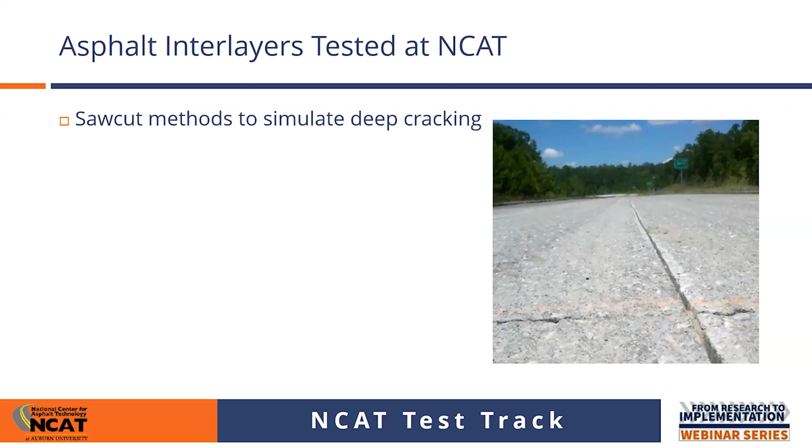So we have done specific interlayer studies, not just reflective cracking studies, for the Texas DOT in the mid 2000s, and then also twice for the Georgia DOT in 2012 and 2018. Texas used their thin overlay mix, that TOM mix, a really rich, fine mix, as an interlayer in the mid 2000s with an extremely successful experiment.

And Georgia, in 2012, they were looking at triple chip seals versus open graded interlayers. And then in 2018, they had a wide variety of test sections, which I think Tom's actually going to talk about later, so I won't steal any of his thunder.

Moving forward, though, we are excited. Some of you may have heard of our NextPAVE Challenge, which we are looking at as our large group experiment on the 2027 track, where we actually have two or three different entries into the NextPAVE Challenge technology ideas submitted from industry, geared towards preventing or mitigating reflective cracking via the use of some form of interlayer. So we're really excited. I can't wait to cut more cracks into our track. Hopefully that gets to work out.

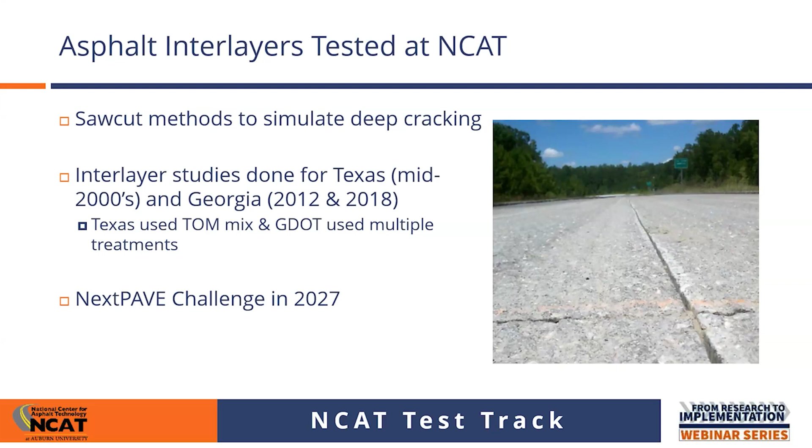Lessons learned over the years. One of the big things that we've learned, and I've also heard this in industry from a couple different sources, is if you are going to do interlayers, specifically open graded interlayers, these are really good tools for preventing reflective cracking just because they're so flexible and they really arrest those cracks and relax those strains.

But you've got to daylight them. When I say daylight, I mean you've got to drain them out the sides. If you don't, you are putting an open graded layer on top of a surface that already has cracks. And so if you get any pumping or water seepage from the bottom, it has nowhere to go, and then you end up creating a bathtub.

You have stripping potential in the aggregates that you use for the OGIs. You've sort of created a reservoir, but no way to drain it. So that's really, really important - there's a couple different options for interlayers, but if you do go with open graded interlayers, it's very important to daylight them.

And also, whenever using multi-layer treatments, specifically double or triple chip seals, you've got to be careful not to overdose emulsion content, because you're stacking these treatments on top of one another. So a lot of times the suppliers may have different recommendations for how to handle that, because you don't want something that's too flexible and doesn't have enough structure sitting up in it.

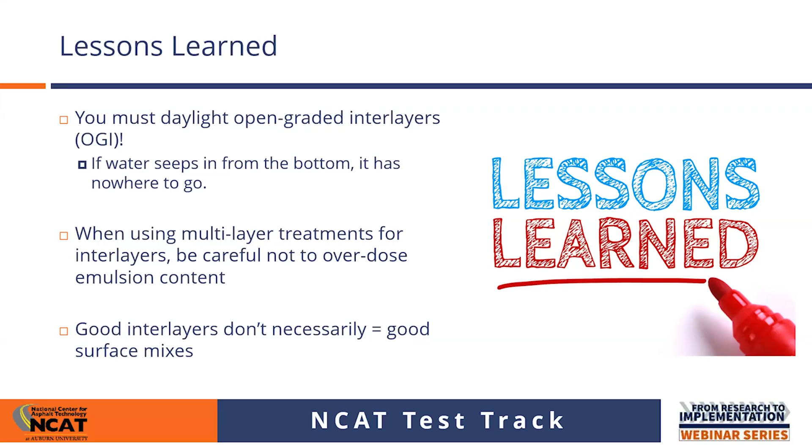Good interlayer mixes don't necessarily make good surface mixes, and this is really important. Texas used that CAM mix, and now that CAM mix is a good surface mix, but sometimes good interlayer mixes are extremely flexible and they don't always make good surface mixes. So these are targeted solutions to prevent reflective cracking, and I think it's a good way to take care of, or to maybe do rehabilitation on a particular route cheaper in some cases.

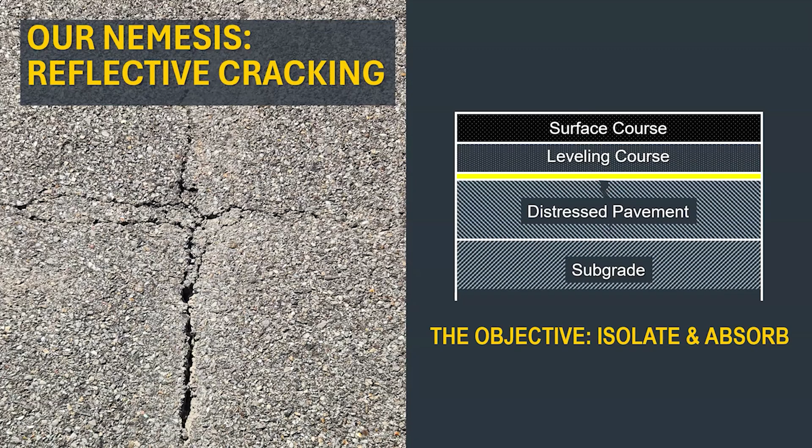So for those who have been out at the test track, it's 1.7 miles of joy in Opelika, Alabama. We're going to be looking at the northwestern portion. That's where the Georgia DOT sections are. They're affectionately known as N12 and N13. And as I go from one study to the next, you're going to see subsections appear.

So back in the first round, back in phase 5 of the track, we went in and saw cut in cracks to reflect. This was a full depth asphalt section, cut at 1/8-inch wide saw cuts, full depth. The intervals going longitudinally were every 3 feet and transversely every 15 feet. So if you assume about a 1 foot influence zone on that crack, about a third of the surface above is going to be influenced by those cracks and those joints moving as they're under traffic.

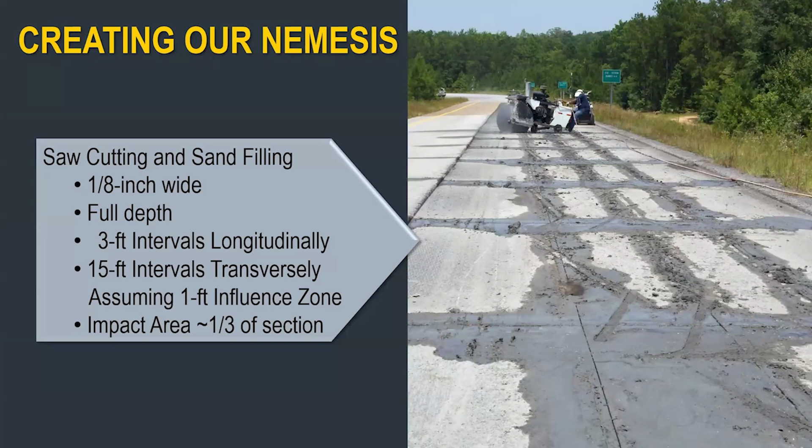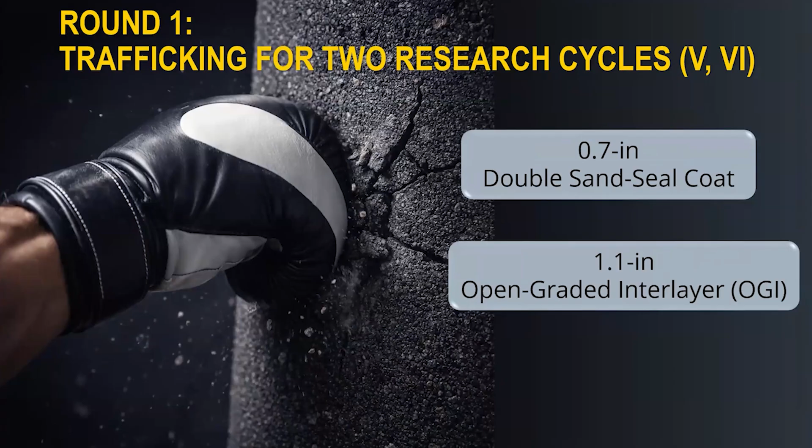So for round one, in phase 5 and 6, we tried a double sand seal coat. It was a little over a 1/2 inch thick, and then an open graded interlayer, a little over an inch thick, was applied. After trafficking of 2 full cycles, we did see low cracking with the double sand seal coat, but more than a 1/2 inch of rutting, so 0.8 inches of rutting. Not much cracking came up through, but there was a rutting challenge with that mix.

For the open graded interlayer, even though it had 50% cracking, so more than right around half the joints reflected up through, all of them were low severity, so they were under a 1/4 inch thick, and the rutting was around a 1/4 inch as well.

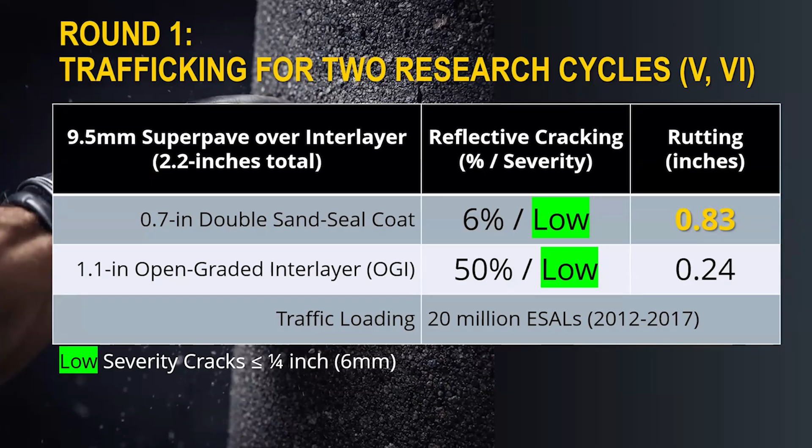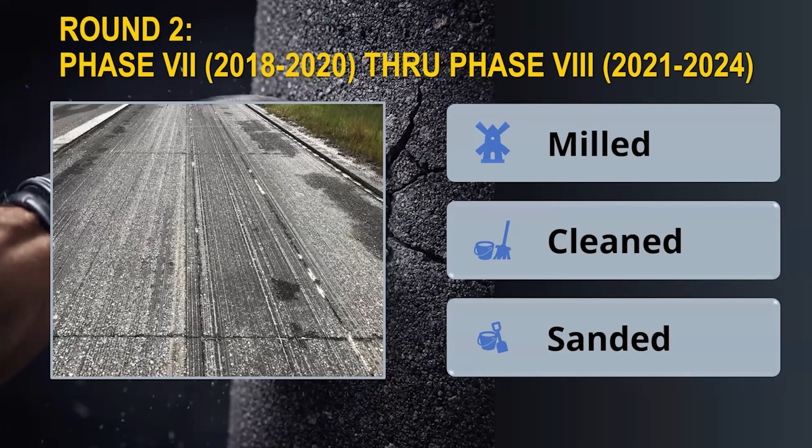So after the 2 cycles of this, we went in and milled off those sections, cleaned out our man-made reflective cracks and resanded them back down. For phase 7 and 8, starting in 2018 and running through 2024, we subdivided each section into 3. So a total of 6 treatments were applied.

So in N12, which the trucks reach first, we started out with a geosynthetic called GlasGrid. The commercial version of this was CG100. And then we went to a Petromat. I'll show you some close-up pictures of this in a second.

A fabric was applied. Our control was a virgin chip seal. It's a number 10 stone chip seal. And Georgia has used this throughout the state with some good success.

For the other things that we looked at in section N13, we looked at a more sustainable chip seal using RAP. I'll tell you a lesson learned with that as we get to that section, followed by an asphalt rubber gap graded mix, and then an open graded interlayer again.

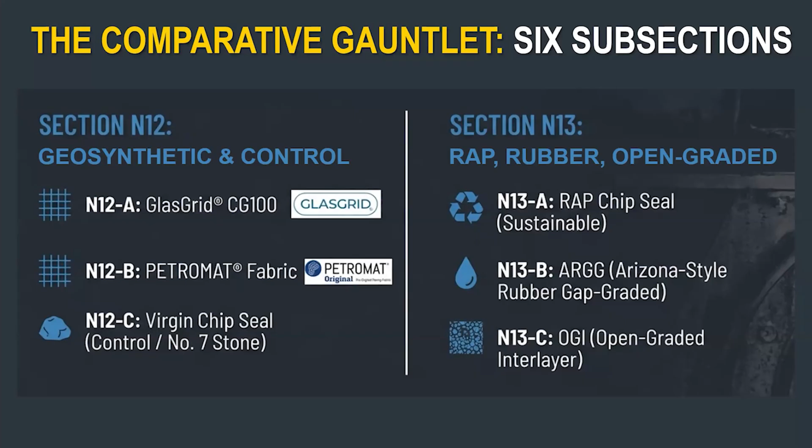So let's go ahead and walk down these interlayers as we were placing them down. Here's a photo of the GlasGrid product going down in the background, and in the foreground you can see the Petromat.

The tack that was applied was a PG 64-22. Full disclosure, if you go to Petromat and place this down, their spec says we should use the PG 70, but as you'll see here towards the end, the 64-22 worked just fine. The application rates were 0.3 and 0.27 gallons per square yard on the sections.

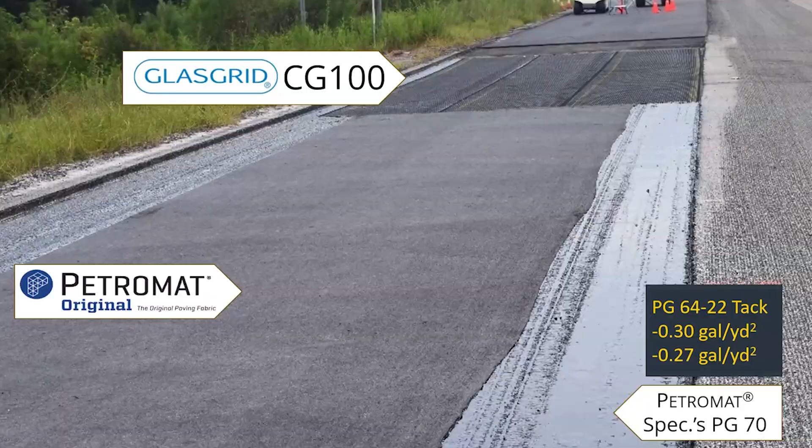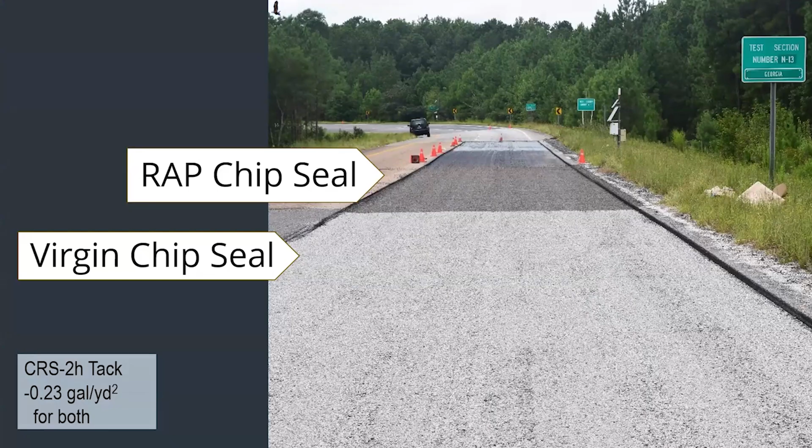Here we see our control, our virgin chip, and then the RAP chip seal in the background there. Both of them had the same tack, a CRS-2h at 0.23 gallons per square yard. Now that rate may be a little high for the RAP chip seal. We think it was because in the end we saw higher rutting in the RAP chip seal, and we didn't expect that because the RAP has already got some coating going on with it. If we were to do this again, we probably would reduce that tack rate.

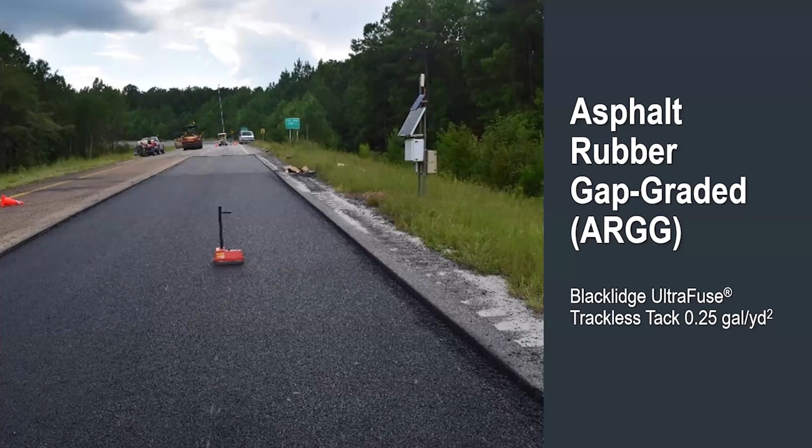Here's the asphalt rubber gap graded. For this one, we used a trackless tack by Blacklidge, called UltraFuse, at 0.25 gallons per square yard. You can see the section going down here. And then scooting up just a little bit further and looking down on it, this is the open graded interlayer, again using the trackless tack from Blacklidge, the UltraFuse being placed at 0.25 gallons per square yard.

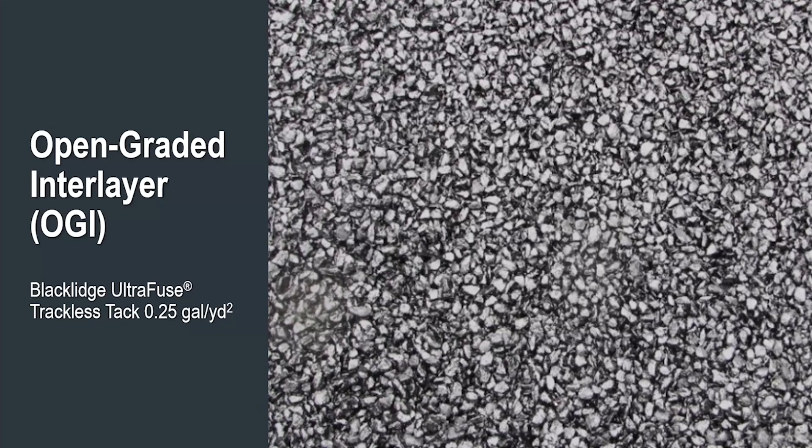Now, before I show you the next slide, everyone wants to know about ride, rutting, and cracking. Trying to get ride on short sections is a challenge, and Nathan and his team do an amazing job with that. But when you're talking about a third of a standard section, getting ride is even more challenging. And that's unfortunately what we found with our first section, which had the GlasGrid in it.

Coming off of N11 onto N12, we had a rough N11, and it started us out pretty rough on the GlasGrid section. Over 150 inches per mile was recorded. Then you can see that actually smoothed down a little bit with trafficking, where the rest of the sections started out between the 75 to 100 range and pretty much stayed in there.

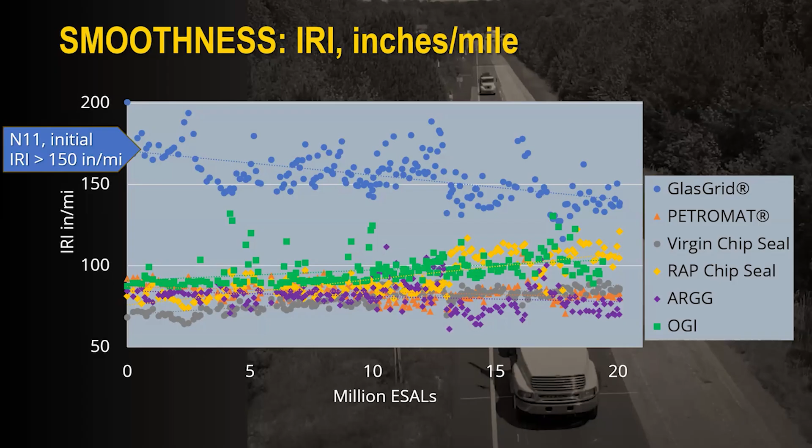If we look at the change in IRI with regard to the loading, which was 20 million ESALs, we see here that the GlasGrid got a little smoother, and by and large, they all pretty much stayed in the same range, except the RAP chip seal picked up 30 inches per mile. Again, that might be attributed to the higher tack relative to what it needed.

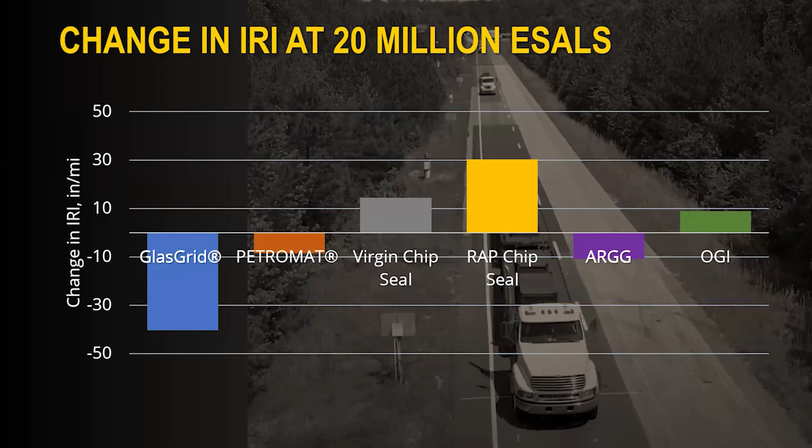Moving on to rutting, the only one that stood out here, as you can see, really no rutting at all for the first several million applications. Then we start seeing a little rutting kick up with the RAP chip seal, and that one actually gets close to half an inch, which we don't like to see. The rest of them remain relatively low rutting.

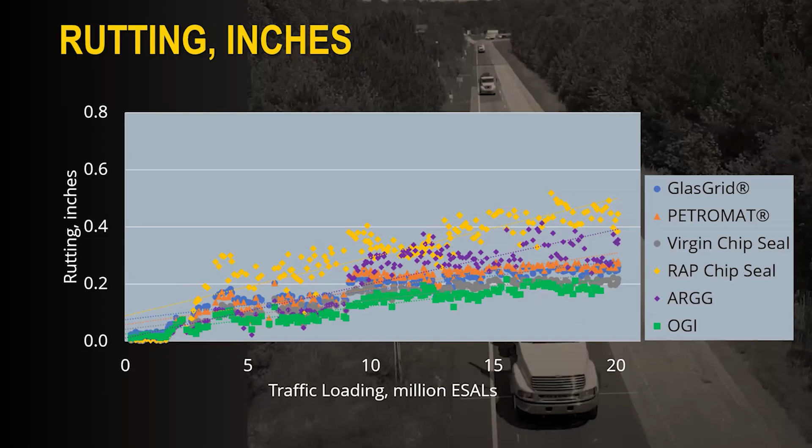So let's go ahead and look at that side by side after 20 million ESALs. What we see here is that we've got 4 out of the 6 treatments all around a quarter inch or less. The RAP had the highest at 0.4, followed by the asphalt rubber gap graded. I think that's because you get a lot of flexibility with that asphalt rubber.

But this study is about cracking, because we're trying to stop that reflective cracking. So how much reflective cracking really did come through looking at these various treatments?

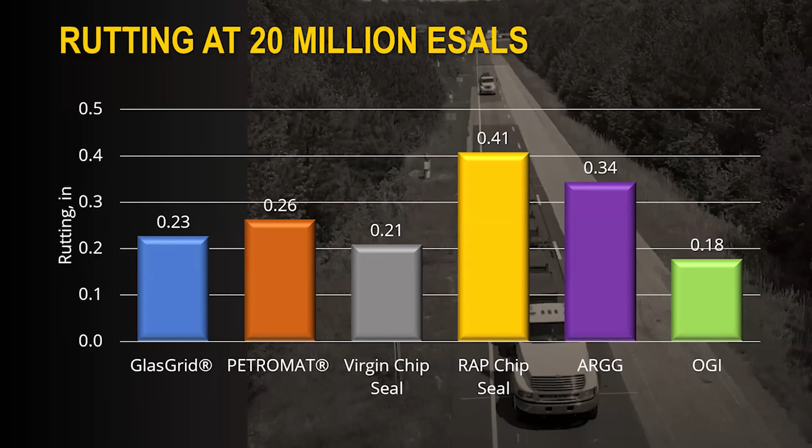Well, they look pretty good. We got an initial bump that occurred with the asphalt rubber gap graded after a full cycle and a half. So this is not starting at 0, this is at 15 million ESALs. A little over that, we got our first crack showing up in the asphalt rubber gap graded. And after 20 million, it finished out with only 3%.

And that's pretty awesome, that's percent of lane cracking coming through. The rest of them held fast to almost 19 million ESALs, and then we saw a little cracking appear in both the open graded and the RAP chip seal, where they both finished out at about 1%, so 0.8. Looking pretty good.

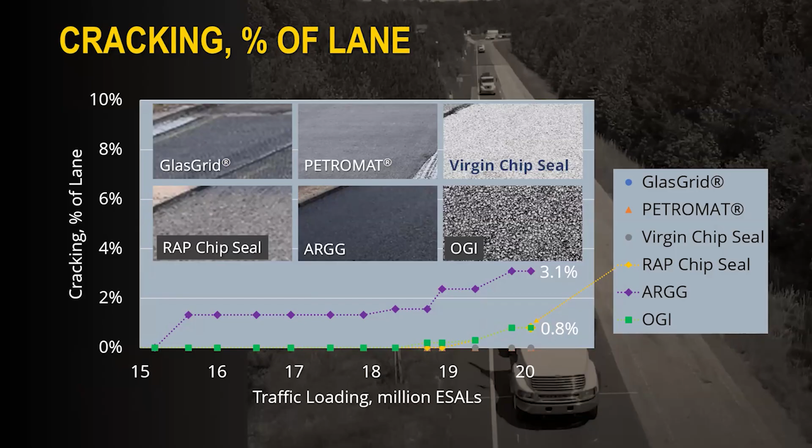So for these sections, let's sum them up, both the first round that we had in cycle 5 and cycle 6, as well as 7 and 8. Here's a summary of all of them, looking at it from a cracking percentage. First of all, the first rounds did not do as well as the second rounds. We did see cracking and rutting in them.

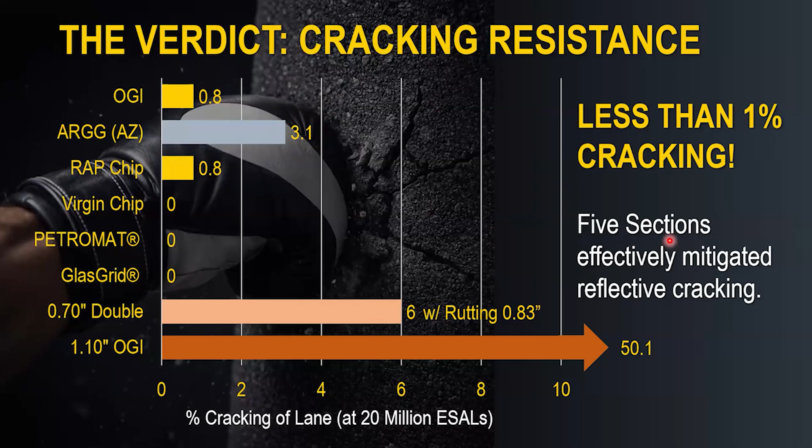But then, for the virgin chip, the Petromat, and the GlasGrid, no cracking at all. Just a little bit of cracking, and the asphalt rubber gap graded had it the most at only 3%. So 5 of the sections effectively mitigated reflective cracking for a total loading over 4 years of 20 million ESALs, which is pretty amazing.

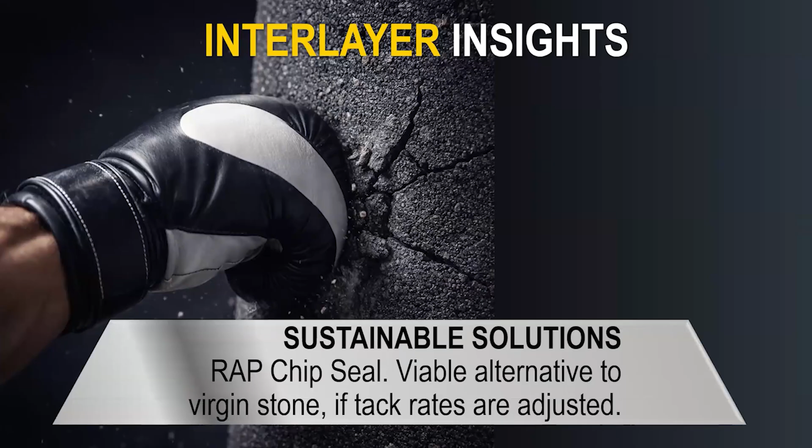So for our interlayer insights, as we go through these 2 rounds where we're trying to mitigate those man-made cracks: for sustainable solutions, the RAP chip seal seemed to work as a viable alternative, although we would adjust the tack rate down, we believe, and that would address the issue with regard to rutting.

For the reinforcement solutions, excellent. The only thing I've heard anecdotally on this: don't let your first application of trying one of these concern you if you have trouble rolling them out and laying them down. If you're not familiar with it, it's a product you have to get used to. Please work with the manufacturers, they are there to support you on that.

And then, a variety of approaches took on our nemesis. They showed that we got the maximum performance. We couldn't get the reflective cracking to come through even after 20 million. So with that, they have been validated by the Gauntlet, which is the trucks out at the Asphalt test track for NCAT.

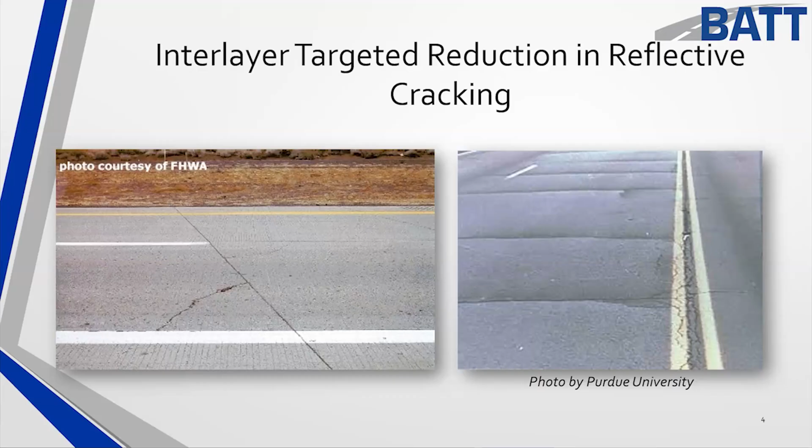And the shear movement was shown years ago to be the most difficult, in studies done by Monismith and others at Cal Berkeley.

In the 90s, interlayers were used, or even before that in France. In 1998, I was working at a company called Koch Materials Company. We brought it to the US naturally because it had a high polymer loading in it and it worked well for our business, but it also worked well for the business model to bring new products and try to innovate. Various levels of success, because we have a much broader climate area than what you may have in areas such as France, from our far north to our desert areas to the deep south.

From 2002 through 2006, I got to work with Bill Buttlar on a National Science Foundation grant where they modeled accelerated loading and testing. There's a reference number if anyone wants to look at this. They developed ABAQUS models and all these wonderful things for pavement design for the interlayer, because nothing was out there that really described the interlayer well at the time. And current pavement designs, there's nothing where you can flip a switch to introduce an interlayer into these pavement designs to do what it does.

Out of this test comes what's called the DCT, that you may hear about today, used up in Minnesota and FAA. It was actually developed out of this work as a test to measure the thinner roadway core properties we were trying to measure back then.

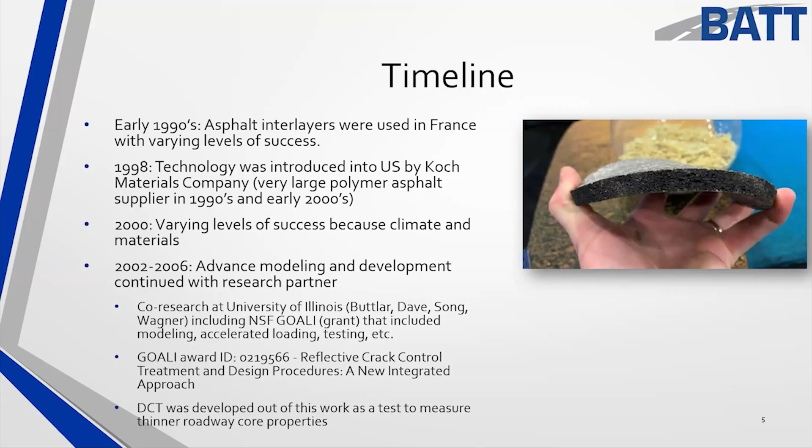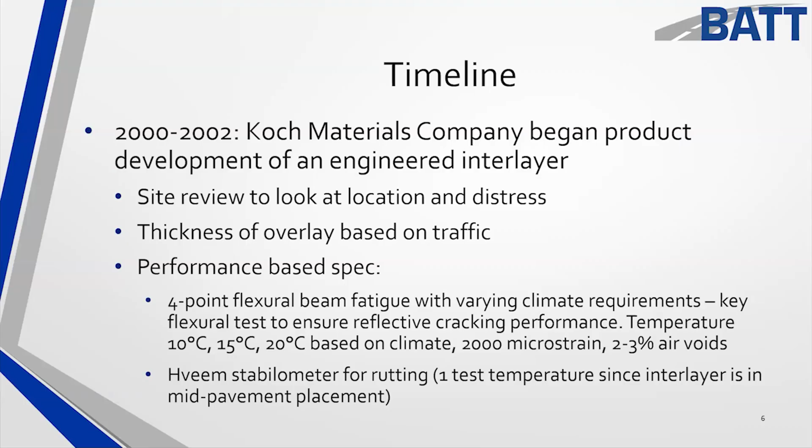And when I say a 4-point beam fatigue device, those out there in the technical world that love to run this test - we're not talking about 200 microstrain, 800 microstrain. We're talking a 2,000 microstrain requirement. So this unit, if not set up right, would about jump off your desktop with the level of movement.

Moving on into what we look at today, there's some 20 states that may have old specs in place. They already mentioned Texas, which has their CAM mix - they use an overlay test. You'll see remnants of this original interlayer, if not the original, in Wisconsin, Iowa, Kansas, Kentucky still uses it, New Jersey, and you may see it with a fatigue spec. You may see it with other tests.

And out of necessity, where I wasn't always able to get the polymers used back 20, 30 years ago, I had to come up with alternate ways and try using newer testing.

While adoption slowed due to lack of understanding, today interlayers are still intact while the surface has been replaced, which has raised eyebrows that we need to go back and look at this product. For example, one was placed in Kentucky just north of me on I-75 with about 40 million ESALs. It was put down in 2007. It has now had two overlays put over top of it with the interlayer still intact. It bridges the joint where you do not know that the concrete pavement is underneath, because by offsetting the crack, it improves ride. So again, it's used but it's not for every pavement. It's a system that we only need to use in focused areas where we have cracking or limited solutions, and I'll show you those here in just a moment.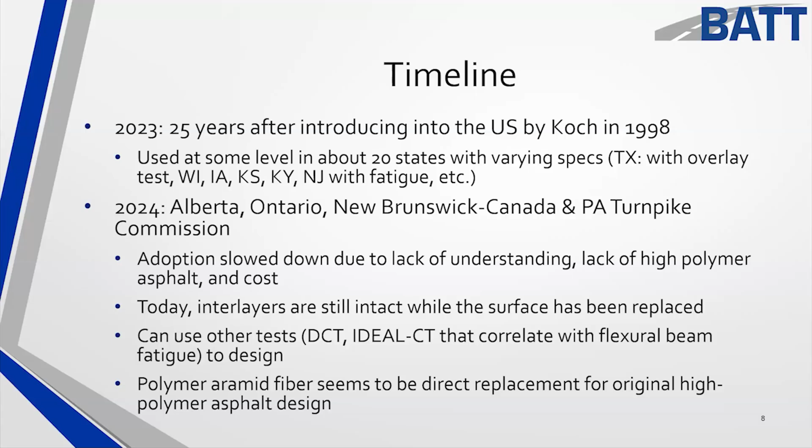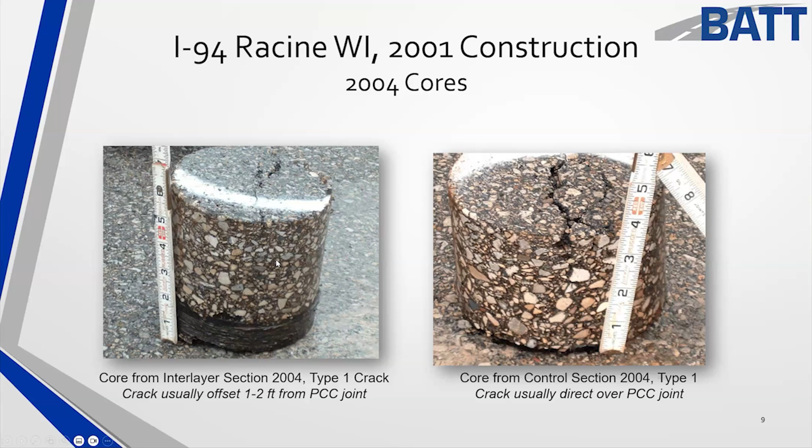The problem that we talk about is what you see on the right. You may have a crack when you take a core, and it's a very pronounced crack that may come through. As you see the crack, if you look closely, you'll see the crack going all the way down with the ruler there, and it does come off the bottom where you would have had the joint. When we began to core where there's an interlayer, here's an actual core on the left with the interlayer on the bottom, you can see the difference in color, the richness of the interlayer. Instead of having an aggregate structure that's filled with asphalt, you have an asphalt binder that we fill with aggregate, almost to a mastic level. By doing this, we have a crack dampening system that really significantly delays the cracks, also causes a waterproof barrier, but offsets the crack for up to about 3 feet. That's the real interesting part of this interlayer, because we went out to core these projects and had to chase the crack across the pavement to even find where the joint was below.

This is the power of using an asphalt dampening system or an interlayer. There's a lot of good products out there that have worked this through the years, and I use the SAMIs myself, or the high polymer chip seals. But the interlayer is the only way that I'm talking about, that I'm going over today, to be able to get a 1-inch to up to about 1.25 inch crack dampening system in place with some level of structure that you can run a paver over it and have something that can be recycled if you want to take it up. But for the most part, it's perpetual. As one person said, this is maybe a way to convert a concrete pavement to a perpetual pavement.

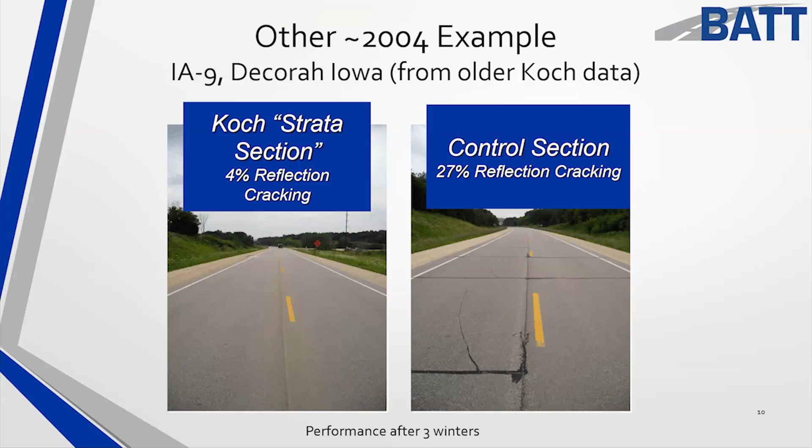At the end of my tenure, and the data that I had in 2006, I left in 2007, we saw about a 71% improvement in reflection cracking. They called it strata back in the day, but that was a high polymer performance design. Today we would call it a BMD design, and we'll go over that here in just a moment. That's using 98% reliable overlay with 100,000 plus fatigue cycle interlayer spec. That represents up to 18 projects built up to 4 years old at the time.

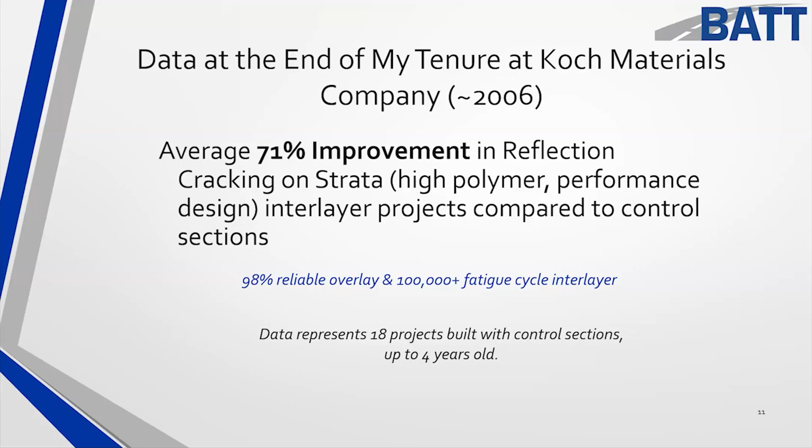So can we stop the reflective cracks? I like to say no. That was my typical answer till I saw data that really changed my mind on that. When you use the reflective crack relief interlayer, University of Illinois found in their studies that it significantly reduced the movement by up to 80%. But you have to have a surface that can still handle that remaining movement. So we can't put something that's ultra brittle on top, or the crack will come through as we would typically see. Now, we're going to slow it down, but what can we do to help remove that last 20%? I've seen SMA overlays over the interlayer that shown much promise with little to no cracks.

Those were in the early projects. I do believe, with the promise of high mod and what we're seeing today, high mod itself does an incredible job. You put it over the interlayer, and I have no reason to believe we couldn't nearly eliminate these cracks. That's not a cheap solution, but if you want to completely eliminate cracking, assuming you don't have excessive movement and slab rocking, we can do that. Otherwise, what you're doing with these systems is delaying the problem. Tom would probably correct me and say, Phil, what about 30 years from now? Yeah, Tom, you're probably right, something eventually is going to come through.

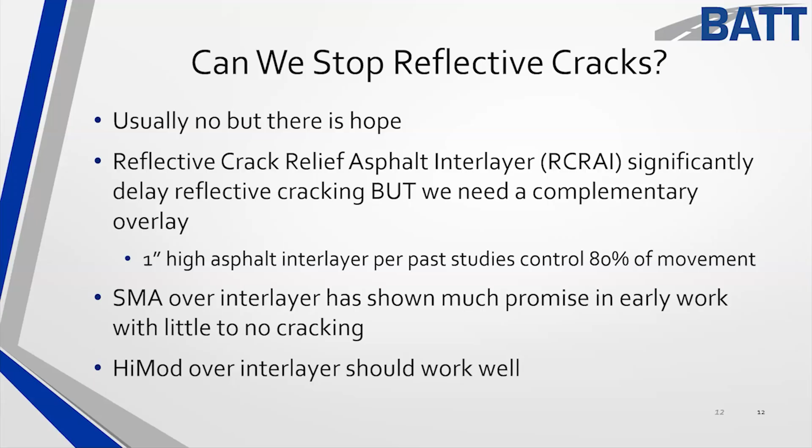So let's talk about the mix design. This is an ultra fine mixture, looking at something with 0.5 to 2% air voids, minimum VMA of 16, more typical is about 18. On the right you see what would be considered a design gradation band. We're using a high amount of fines, so contractors out there with piles of fines, this is for you. Typically we're using natural sand, manufactured sand, and screenings to make this blend of materials.

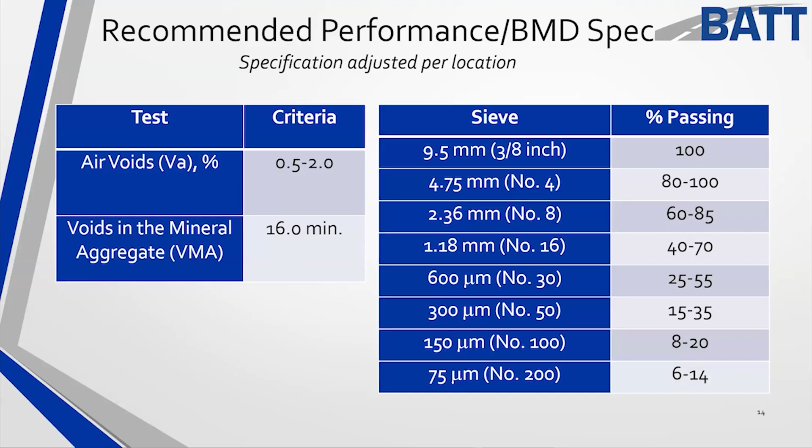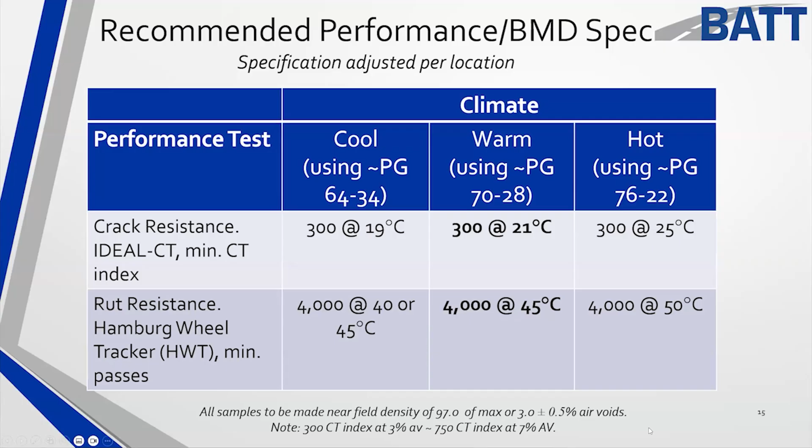Depending upon what climate you're in, I bolded the center one because that's where I am in Kentucky, so I sort of use that spec. If I move over to the right as we approach Alabama, down at the track, guys, I'd probably be looking at what you're recommending once you get into that 22 and warmer climate. It just happens that a CT at 25 aligns pretty well with what you're doing down there anyway.

Why in the world did I use fiber on this one? I don't have the polymer system I had back then. I needed tensile resistance, and it complements the system really well by giving me tensile strength. Bottom line is, whatever you can use to put in this system to get these values, you can do it.

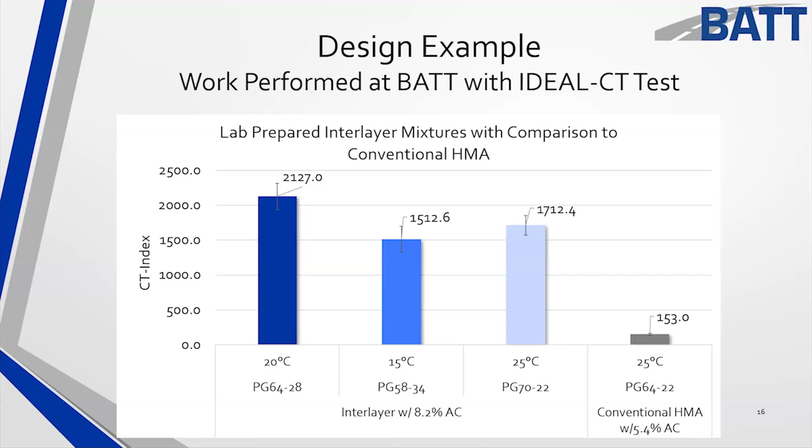This is a performance-based design. The conventional mix is that little spot over there on the right, maybe at 153, and I'm telling you, 153 CT index is a good number. But it is possible to achieve higher values than I'm showing here. Nathan, I don't know what you've achieved at NCAT, but I'll just throw it down that I've gotten over 2100 at 20C on a CT index. So there's the challenge to you, okay, see what you can do.

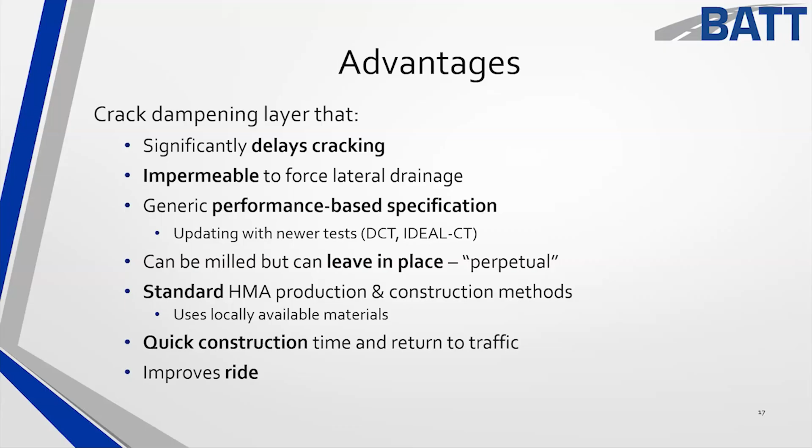The crack dampening system significantly delays cracking. It's impermeable, generic performance-based specs, and it can be milled, though I recommend leaving it in place. It's not going to crack, and it does heal with all the asphalt that's in it. Using standard HMA production and construction methods with locally available materials, this is something a contractor can run through their plant easily. Quick construction, quick return to traffic, and it improves the ride.

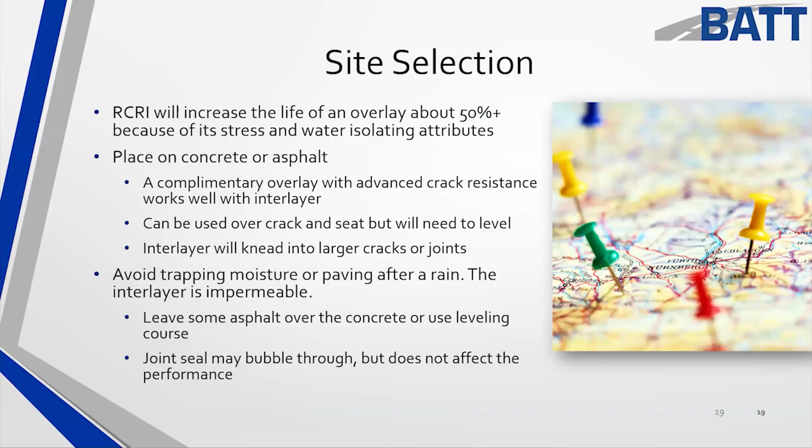A little bit about site selection. I'm not going to spend a lot of time on this, but when you make this impermeable, you can trap moisture, so you have to pay attention to that. There's a less impermeable version that can be designed to open it up a bit. You lose a little bit of crack resistance, but not much.

The overlay, depending upon the traffic level, these are what I've recommended over the years. This has been my safe zone. I have never seen an interlayer rut, and I want to keep it that way. By doing studies and using performance testing in the laboratory and dialing it in, these are the values that I came up with years ago, depending upon the traffic level.

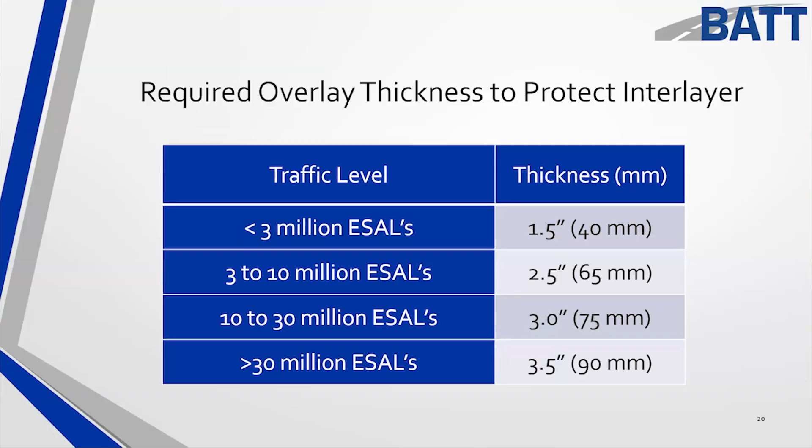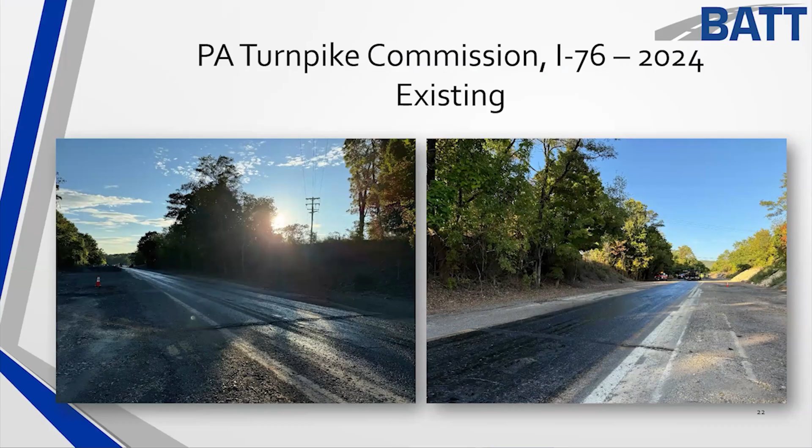2024 project. This was a section of the turnpike. I'm going to move through these pretty quickly and then we'll be done. This was a section of the turnpike that we did in 2024.

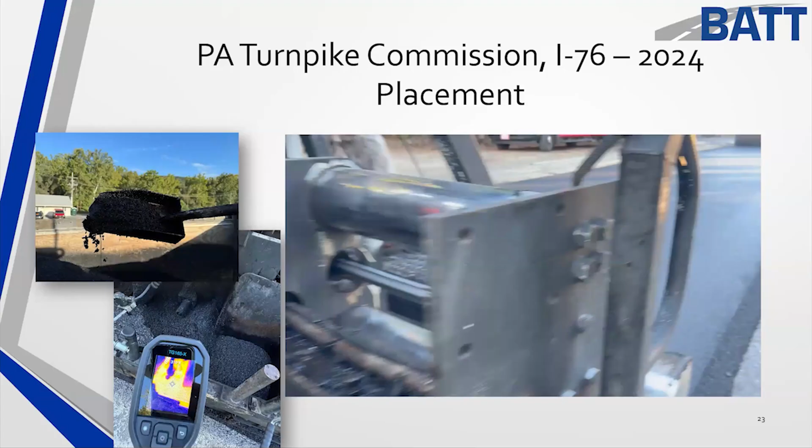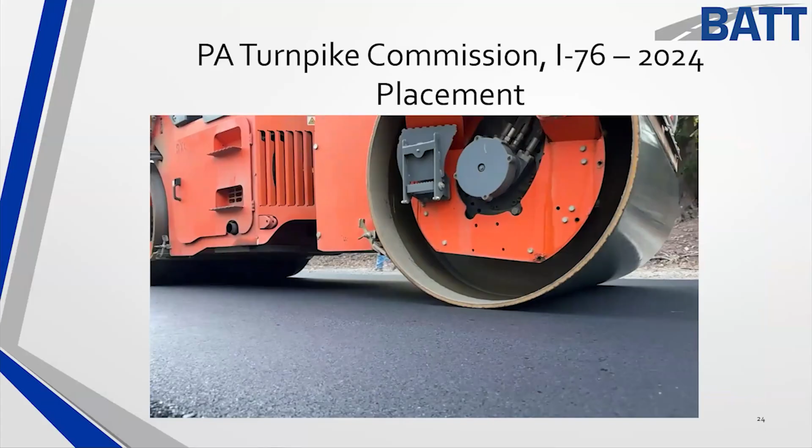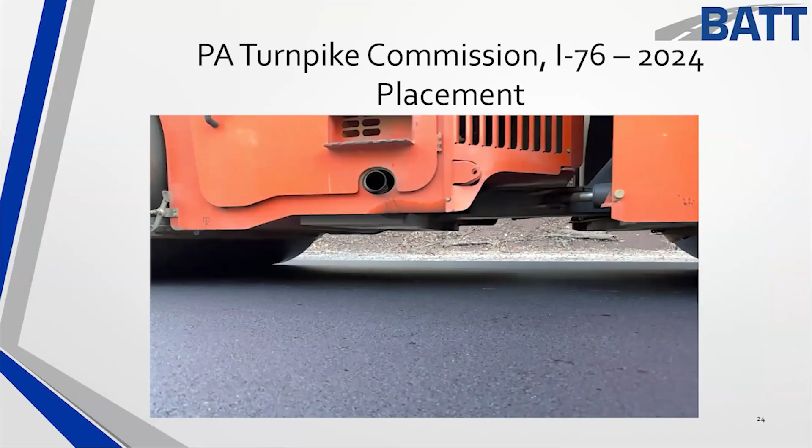This was actually the test section that we put down, and this was an abandoned area, so we did not have any traffic on this one before they moved out to the main site. You get an idea when you put a roller on it. You would think something that may have 8.5 to 9% asphalt may move everywhere, but it is incredibly impressive underneath the roller. If you do get the asphalt way high on this one or way low, you do get a very unstable mixture. But in this case, you're compacting at about 1/8 of an inch per inch, and there's not a lot of room for it to go behind the paver.

There is a little bit of flushing on this one that you see. They decided they wanted to vibrate this one, which is fine. You're going to bring the asphalt to the surface. This is not a riding surface, this is an interlayer. Some may ask, do you want to put tack over this? Absolutely. This project may have had enough free asphalt, we may not have needed the tack, but we still tacked it.

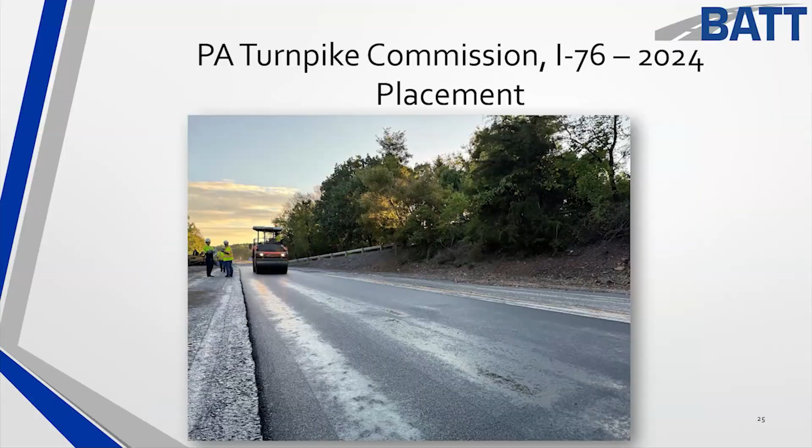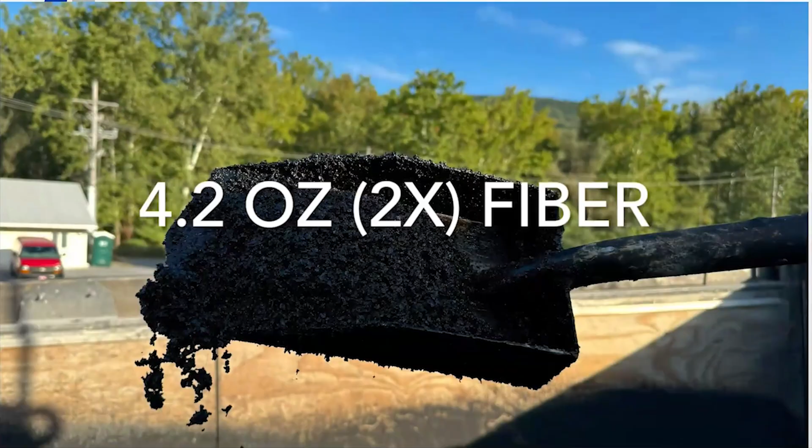This gives you a little bit of an idea. This was done up at New Enterprise. This is a quick video just summarizing everything that we just saw. Surface Tech supplied the fiber on this one that went up there. And this, again, just shows you what we had looked at before, going through the paver.

There's another one I'm going to show you here in a moment where we had some hand working of the mixture. Normal process, the rolling that you've seen, and then I've got a picture here coming up of where it was actually put down on the interstate up there, and of course that looks good, and that's the team up there with Chris Forey and the folks at the Turnpike.

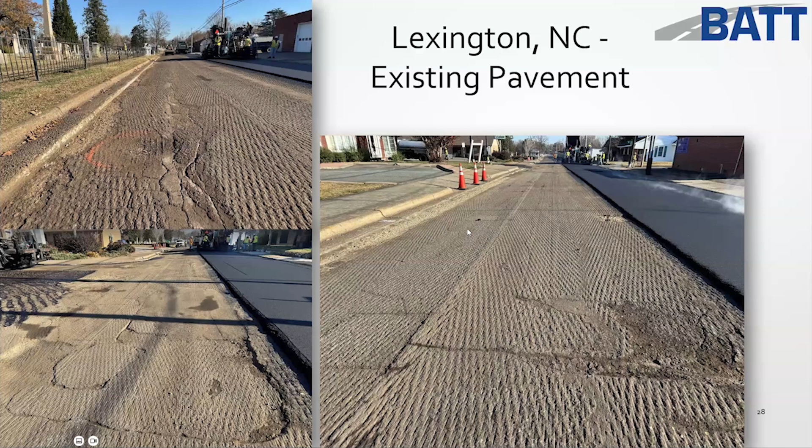Last year we went to a city street. This is a very favorable project for city streets because you're locked in with concrete, you can't do much with it. And this is a pretty ugly one. What we're looking at here, we had to do special milling along the curb line to be able to key in the interlayer. I'm just going to move straight to the video to summarize this because this, again, gives you an idea of the distresses, the tack before, the fineness of the mixture.

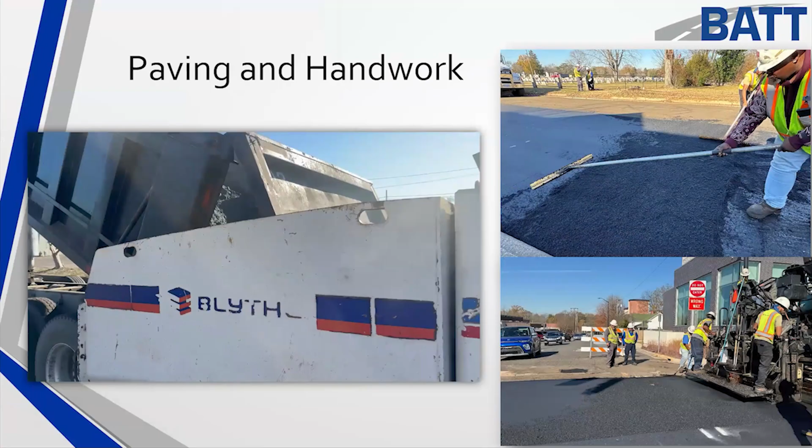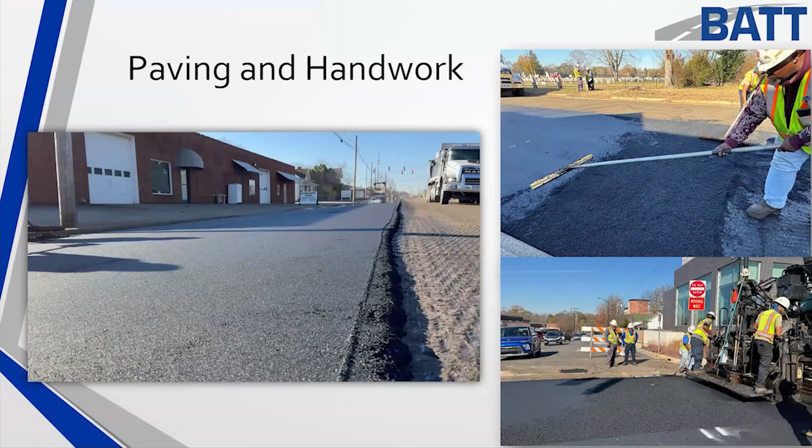Again, the paving process, the hand working is over there on the right. You can hand work this one, move it around. You can imagine with the asphalt content, when it starts to cool, it will get gummy, but nothing unusual. Let me just move straight to the video on this one.

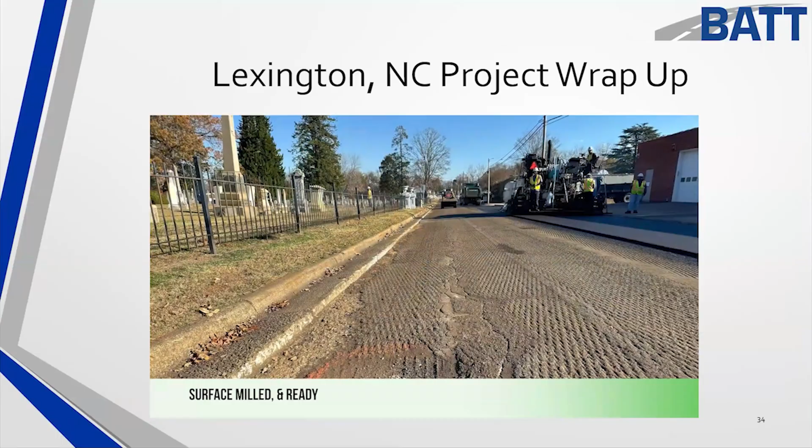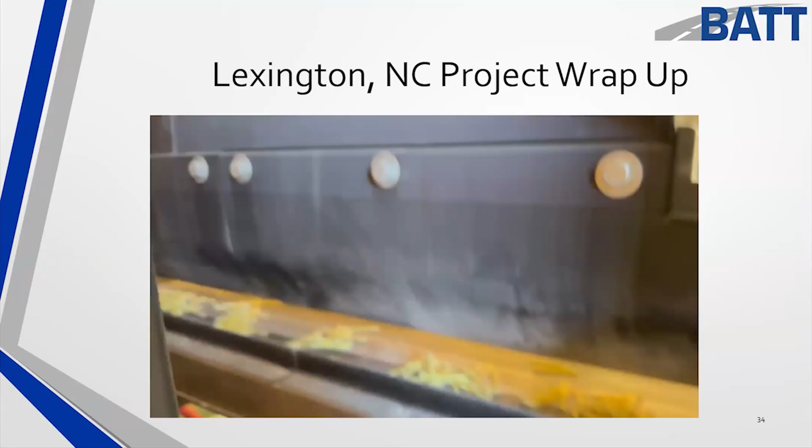Again, the pictures that we saw before. This, again, giving you the idea of what we were covering. Blythe Construction did this project over in Lexington, North Carolina, did a great job with this one. This one had a little higher asphalt content because we're working with the granite materials. Again, showing you the fineness of the mixture. No problem going through the paver.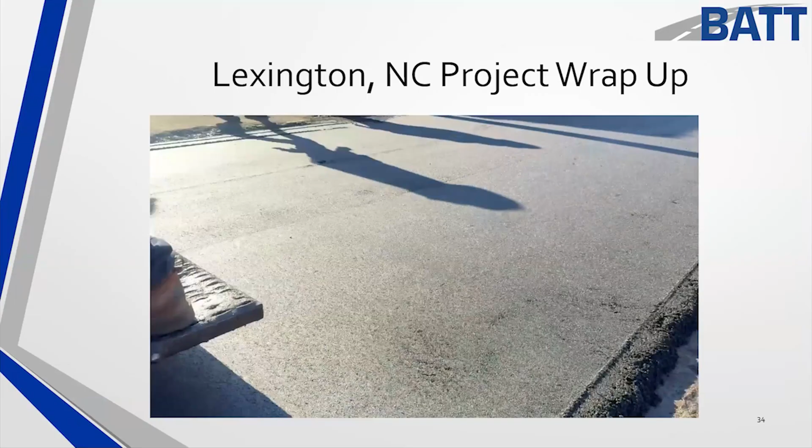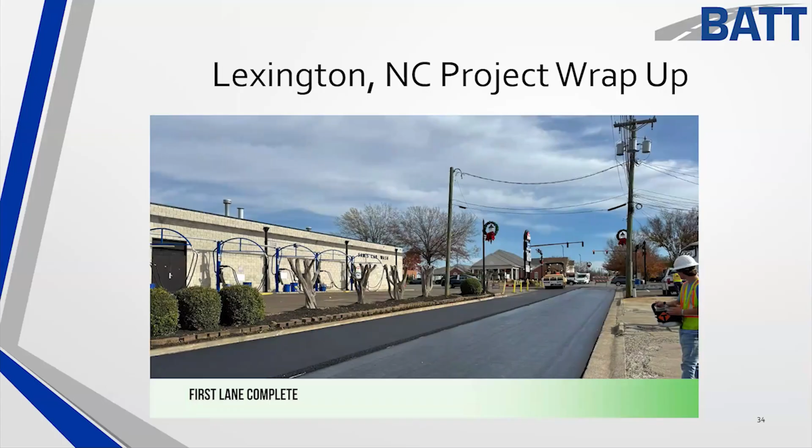Very little sticking because, again, we're not using the high polymer on this one. We were using a 7622 on this one with a double dose of fiber. Again, this one had about 1.5% air voids, I believe. This shows you what it looks like with one pass the interlayer down before we put the other. Again, the hand working, no problem.

The final interlayer, and then there's the guys down there that we worked with on the project, and the guys over at Withers Ravenel, the consultant. Now they're putting the surface on, and hopefully it's ready to perform.

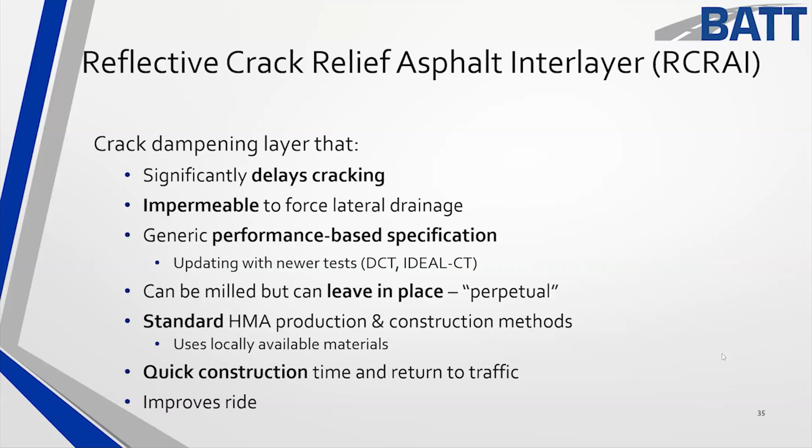I've already covered what we talked about here, but I'll hit it again: we're going to significantly delay the reflective cracking. It's an impermeable, performance-based spec. You can mill it or leave it in place. Standard production, quick construction, improves ride.

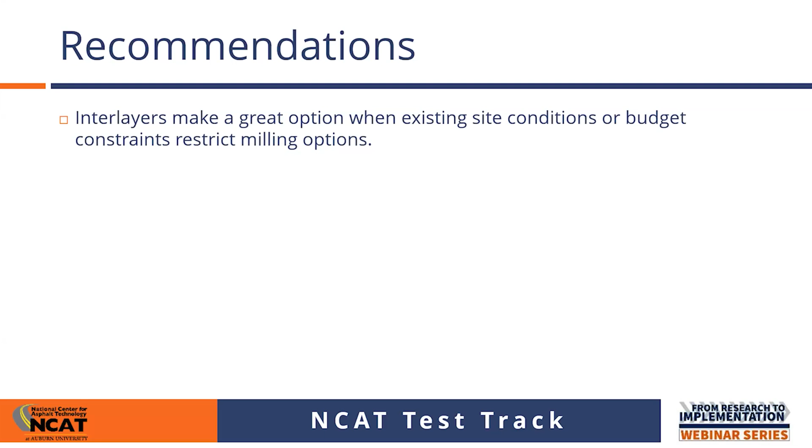To summarize what Phil and Tom talked about: these interlayers, whether asphalt-based systems or special products designed for reflective crack prevention, make a great option whenever existing site conditions or budget constraints restrict your options. Maybe you can't mill as deep because the city maintenance budget can't handle it. These treatments and technologies are great options for you.

A couple things Tom talked about: being careful, you need to adjust the tack rates to prevent over-softening or rutting, especially if you're using surface treatments like RAP or virgin chip seals. If you use too much tack or too much emulsion, you can actually end up over-softening that layer, and then you get rutting, not from whatever you're overlaying on top, but rutting from that interlayer itself. So you have to be careful about that.

I loved that, Phil. I actually participated in the Q&A and asked you a question. I like your rutting spec, and I'm curious, but we'll get there in a minute.

Quality control is super important. For some of the asphalt-based products, it's important because these aren't traditional bread-and-butter asphalt mixes. Phil showed a picture of just a black layer that he talked about: instead of adding binder to rocks, you're adding rocks to binder. So even in situations like that, QC is very important, but especially for the engineered products.

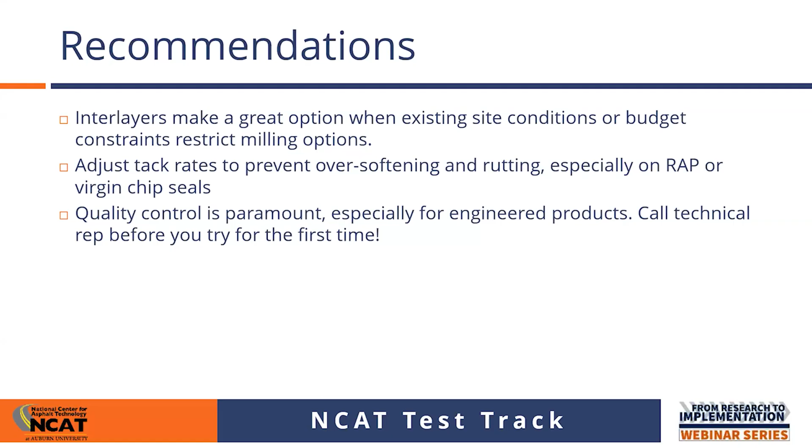The specially designed interlayers, if you are doing something like this, it's a big recommendation to call a technical rep before you try it for the first time. What you don't want to happen is have a bad experience with one of these technologies and then never use them again. We've all seen that happen with all kinds of different technologies in our industry.

I'm quoting Phil here: he said crack dampening systems, or asphalt crack dampening systems, can significantly extend the life of overlays. He talked about improving ride in general, and some of those pictures Phil was showing of the milled surface, I think it was the second one, when you were in a municipality, Phil.

It's like milling and maintenance 101. You don't chase cracking when you're milling, because otherwise sometimes you'll just keep going and going until you get to dirt. So you've got to have good maintenance options, or those cracks are going to come right back through.

So these are great for those types of applications, but be careful about trapping moisture. I remember the first time I ever had to deal with an interlayer, I was getting some questions, and I called Phil about putting OGI as an interlayer in a section that was milled, but the shoulder wasn't milled. Phil said don't do it, because you're creating a bathtub. So no matter what you're doing, whether it's OGI, open graded interlayers, creating a bathtub, or like what Phil talked about, and I think Tom talked about it too, putting these asphalt membranes on top, you don't want to create pore pressure and end up trapping moisture and blistering from the bottom.